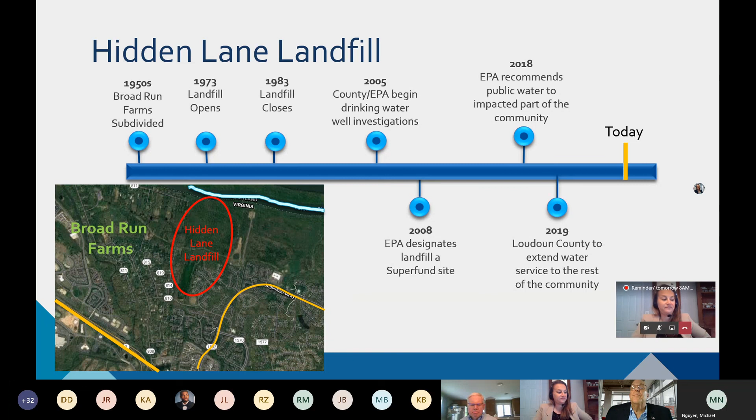I'm going to take a step back and talk about where Broad Run Farms is, so we get a better understanding. Broad Run Farms is north of Route 7—that's Route 7 right there—between Route 7 and the Potomac River.

One thing I want to point out on this map: this white line is the Potomac River. A lot of these lots down here are really close to the river and are in the floodplain. There could be wetlands—just something to keep in mind.

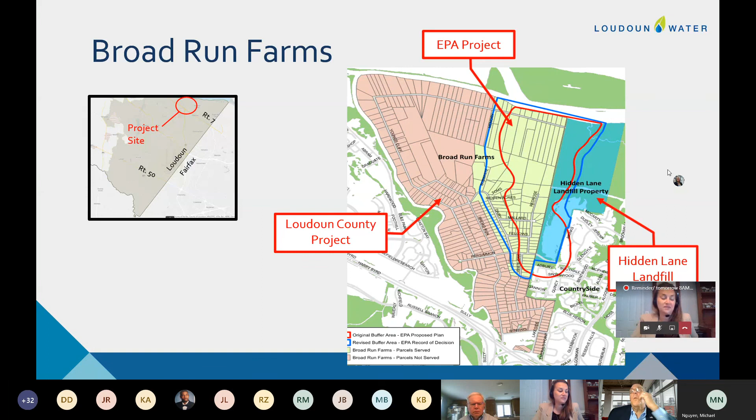The project consists of over 3.5 miles of 8 and 12-inch water main. We are going to provide a water service line and a meter crock for each of the buildable parcels, but we are not connecting any homes. The county isn't paying for any availability fees for these lots, so if a property owner would like to be connected to the public water system, they'll have to come back in with a plumber after our project is over and make the connection themselves.

Something else interesting about this project is it's a brownfield site, which brings up a lot of challenges. Because it's an existing community, we're going to try to stay in the VDOT right-of-way as much as possible. But as I mentioned before, there is an existing low-pressure sewer system out there.

Unfortunately, we think the sewer main is buried at about 3.5 feet deep, which is right where we'd like our water main to be. So it could present some challenges depending on where that sewer main was actually laid. Because it's already a developed community, we may also run into problems with the existing electric, communications, and possibly gas mains out there.

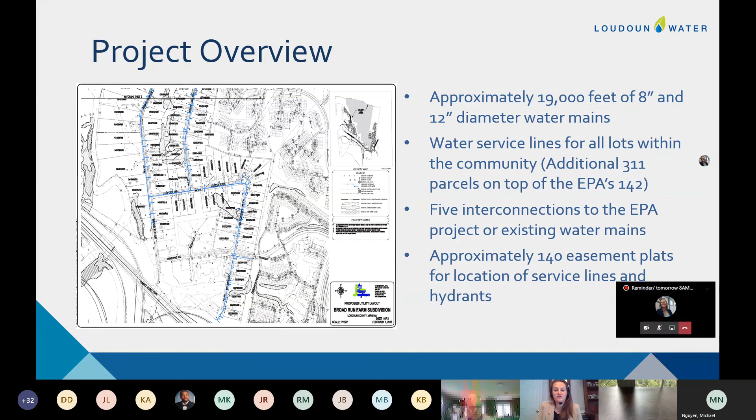So this project was included in our 2020 CIP. It's Water 138. We allocated $11 million for design and construction. This money will be fully reimbursed by the county, and the county has already authorized $1 million for the design.

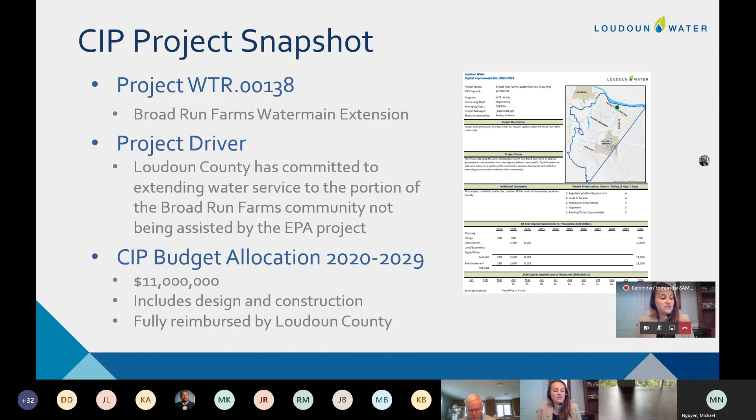So we wanted to talk a little bit about the task order fee and how we got there. As I said before, we're using J2 engineers for this design task order. We broke it down for you a little bit about how we got to that $752,000. Basically, J2 is about $500,000 of that, and then they have some sub-consultants to finish out the rest of that task order fee. The preliminary engineering that we're showing here includes all that field survey I was talking about, because we asked for the field run survey.

It includes gathering and reviewing any as-built drawings, either Loudoun Water as-built or any dry utility as-built, and reviewing that information. The design fee is literally just putting the plans and specifications together. We're assuming there'll probably be about 30 or 40 sheets in this plan set because it is just a water main, but it's over 3.5 miles of water main, so it's a lot of water main.

The permitting, like I said, it's a Loudoun County grading permit, it's a VSMP permit, it's a VDOT permit to actually get approved. And then the easements, we allocated money for about 60% of the lots to have an easement on them. So J2 will draft all those easement plats, one draft and one final, and hopefully we can make that work for the homeowners.

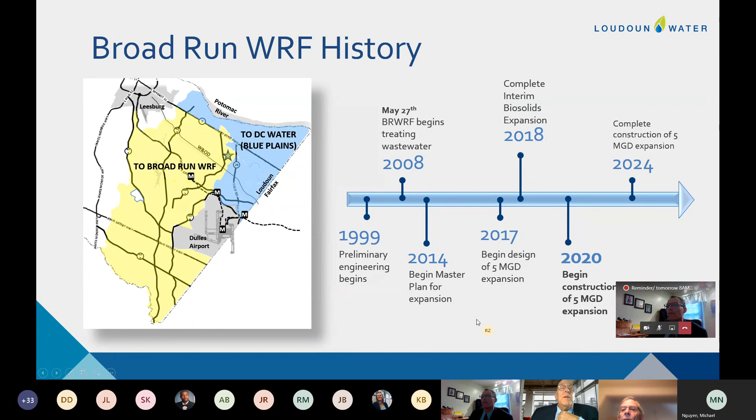Will the JLMA go to Broad Run? That will most likely go to Broad Run. It's sort of undecided at this point what that's going to look like, but in time that flow will probably go to Broad Run.

Some facts about Broad Run: it was commissioned in 2008, a 4-year construction process from '04 to '08. The original plant construction was $190 million for the initial 10 million gallon per day capacity, based on 2006 dollars. At the time, Broad Run was the largest membrane bioreactor treatment plant in the world when it came online in 2008. It's a very highly automated, state-of-the-art facility, and for good reason, because we have very strict discharge limits here in Loudoun County for the plant.

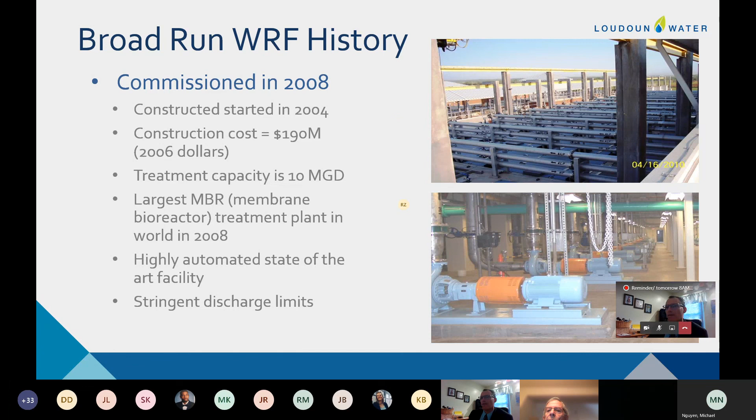That same philosophy applies to the next expansion, assumed to be up to 20 MGD out in the future by approximately the year 2030, give or take. Again, there's some uncertainty as you move out into future dates, because we need to take things year by year, and that's 10 years out. It'll come into clearer focus as we get there for the future expansion. But the point here is that growth and increasing wastewater flows are driving the need for this expansion to 15 MGD.

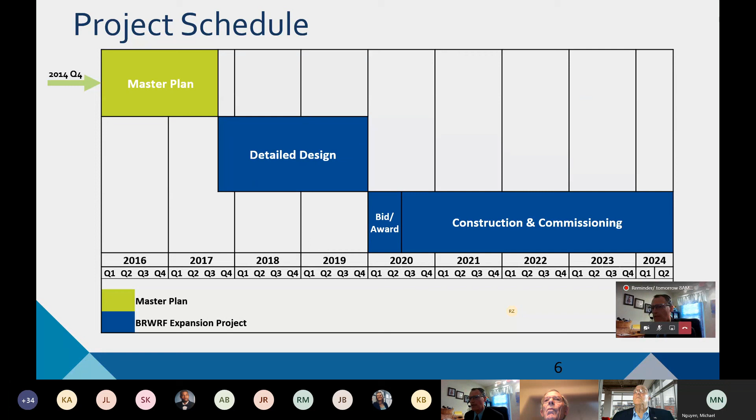Sure. I can say from my own personal experience, working on the tail end, a little bit of the preliminary design and through the design, that we've taken a lot of care with our contract documents to make sure the work and the scope is clear, and that we've done everything possible to assure it'll be complete by 2023, 2024. So that's one thing, and also there is some variability in the flows.

So that's one aspect, Rick, and if I could weigh in, another component of this is the fact that we have planned the work so that we have early milestones that include the additional equalization. We're doubling the size of the plant's equalization, which is more than necessary for this particular expansion. But there was some economy of scale in building a 10 MGD, or 10 million gallon, EQ basin with this project that will also be there and sufficient for the next expansion. That extra equalization gives us storage on site to deal with extra flow during times of heavy flow, and will help mitigate some of that risk you're talking about.

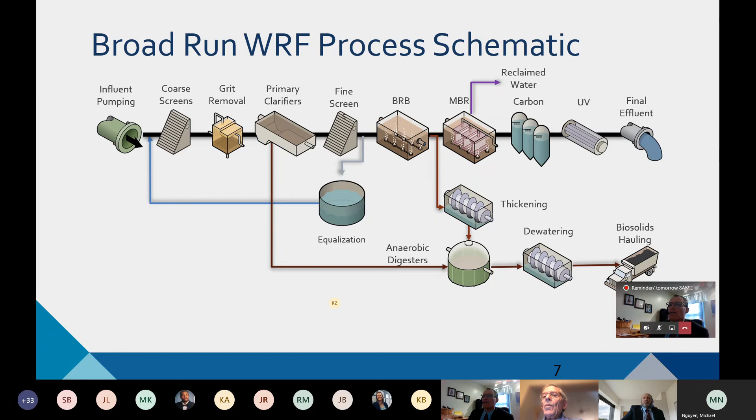I've got a process schematic of the existing Broad Run facility on the screen here. The liquid side of the plant moves from left to right across the top of the screen, and we've got our equalization, and the solids process drops down here and moves left to right on the bottom. When we start to add in the new treatment facilities, the yellow outline indicates new process structures included as part of the expansion project. These are more of the upfront preliminary and primary treatment processes where we're adding new footprint or new structures - of course, there's the equalization tank that Roddy mentioned as we were discussing the prior slide.

The blue shows where we're modifying existing process structures within the same building envelope or concrete footprint to re-rate them and get the capacity we need, so the overall plant has a 15 MGD capacity. It's the simpler structures and processes where we have new concrete footprint, and the more complicated processes where we're able to re-rate and make modifications in the existing footprint to get the additional capacity.

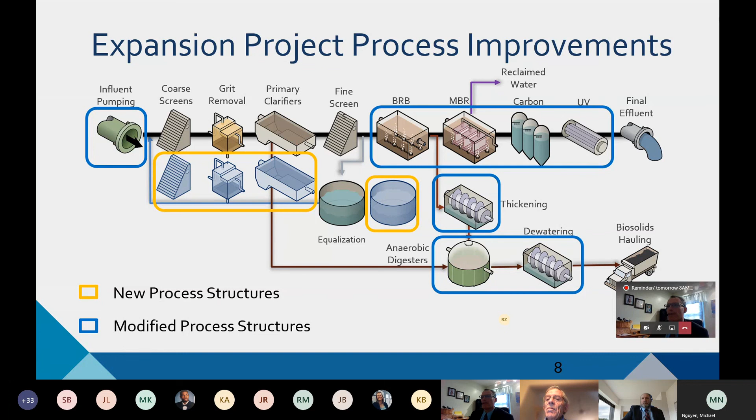As we take a look at a plan view of the project, I've got the same theme going, where yellow represents the new process structures and blue represents the modified process structures. The little red squares show a portion of some of the pipe-to-pipe tie-ins included in the project.

The point I want to illustrate here is that most of the plant is impacted by this project. It pretty well touches all of the processes, but again, the new process structures are minimal, as few as possible. We utilize the ability to modify process structures where possible to get additional capacity without having to build more concrete.

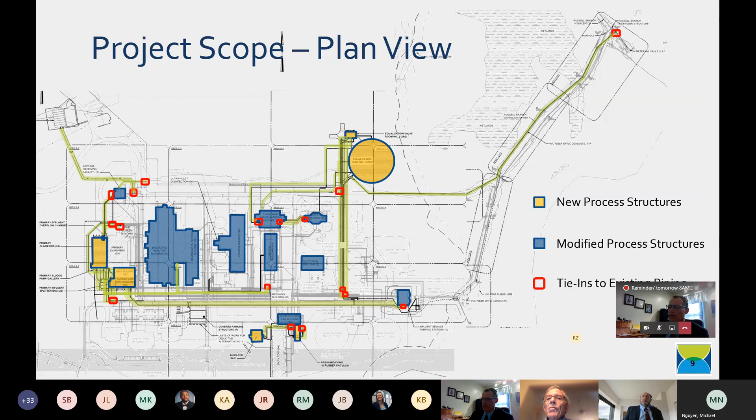This ties into the cost saving measures included in the project. One of the guiding principles of the master plan work done in 2014 to 2017 was that we were going to leverage existing assets first and utilize the resources we have built and in place to the greatest extent possible, in order to help get us the additional capacity.

We've done that by minimizing new structures and optimizing the secondary and advanced processes with modifications within the existing concrete footprint. It's those secondary and advanced processes that are more complicated and more expensive, so it does save money to be able to modify those without having to add additional concrete to get the additional capacity.

One other point to make is that our solids dewatering processes create a high strength side stream waste, and we are actually able to send that to DC Water for treatment rather than having to build a treatment process as part of the expansion to treat that small volume high strength waste stream.

The other point about cost savings is that there's an economy of scale factor built into the project, because we have consolidated several additional smaller CIP projects related to Broad Run, along with some repair and rehab items associated with Broad Run that were on the books, into the single contract, which gives you that nice economy of scale factor for this project.

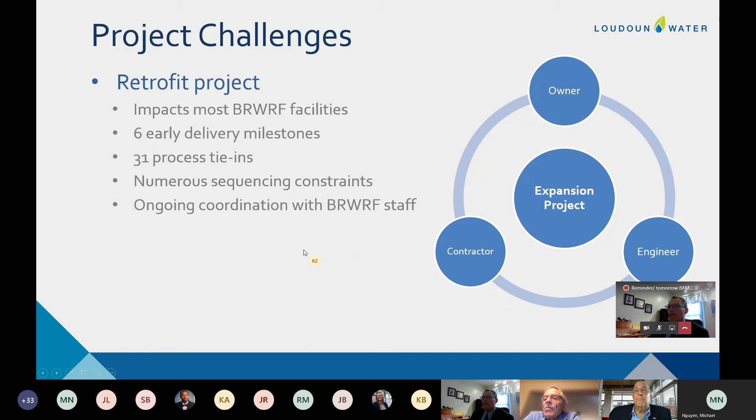But since this is a retrofit project and we are required to meet permit throughout the course of construction, in order to protect the public health, it casts a different light on the owner's responsibility. Meeting permit through the course of construction drives us as a top priority as we work to construct the new facilities, making sure we observe all the sequencing constraints and that all the tie-ins happen appropriately without disruption to the existing plant, so we protect the operation of the plant.

One point I want to add is that this project is kind of like a surgical procedure, or a series of surgical procedures that are very delicate, because we're working on an existing plant. Instead of doing the alternative, where we would expand the plant to the north as a kind of greenfield 50% expansion—basically building 50% of capacity, or 5 MGD, to the north and then tying it in at the end—that approach would cost a whole lot more, but it would be a little easier to manage because you'd just be tying in those facilities at the end.

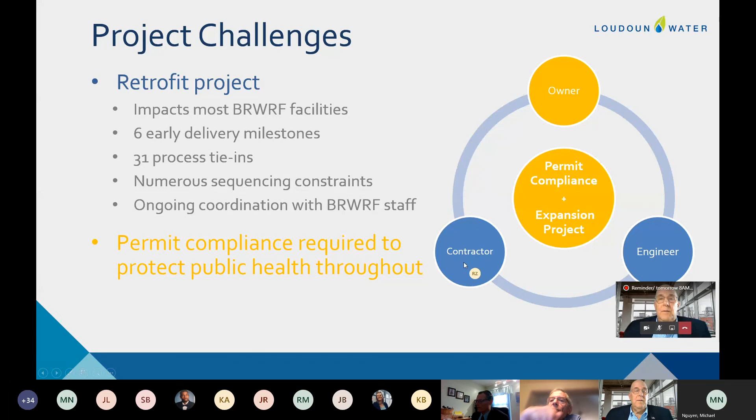Okay, and Rick, I have a question about the slide before. Yes. So you said you included additional related CIP projects and maintenance, repair, rehab items. About how much are those two items worth? I don't have an exact figure, but it's just a few percent. I'm going to say plus or minus 5% or so, based on some calculations I did 6 to 8 months ago.

And did Hazen design these related CIP projects? Some of them were already designed as separate projects, and then they were brought into the larger expansion. Some of them didn't have a whole lot of design really associated with them, and that's sort of the repair and rehab variety there, kind of replacement items, and there were one or two smaller designs that happened independent of the expansion project by Hazen that were then brought into the expansion project construction.

Okay, and will they be the projects that were designed before? Are they going to take over the construction administration, which I guess we're going to talk about next, on those CIP, those related projects? Right, they would be folded into the overall or the larger construction administration, yes.

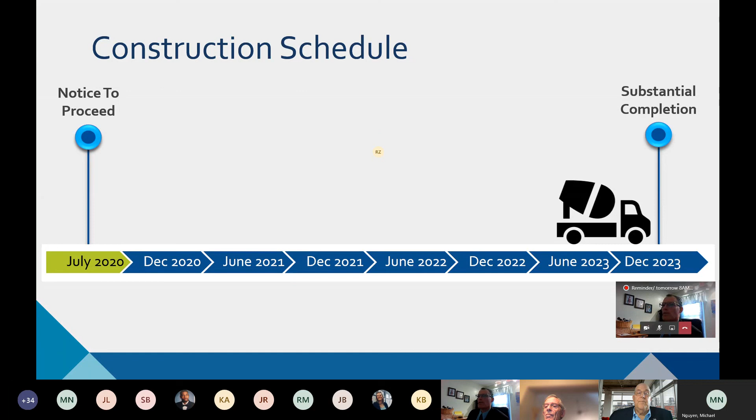So now we're going to walk through a construction schedule that will take us from notice to proceed to substantial completion, complying with all of the requirements I mentioned on the previous slide about meeting permit throughout the course of construction, the sequencing constraints, and other items built into the contract documents to protect us during construction. So we're going to step through in 6-month increments through the construction here. So here we are at the notice to proceed.

The hatched items are the buildings that were blue previously, where we're modifying existing structures. The darker items are the new concrete footprint that I characterized with yellow on the prior slides.

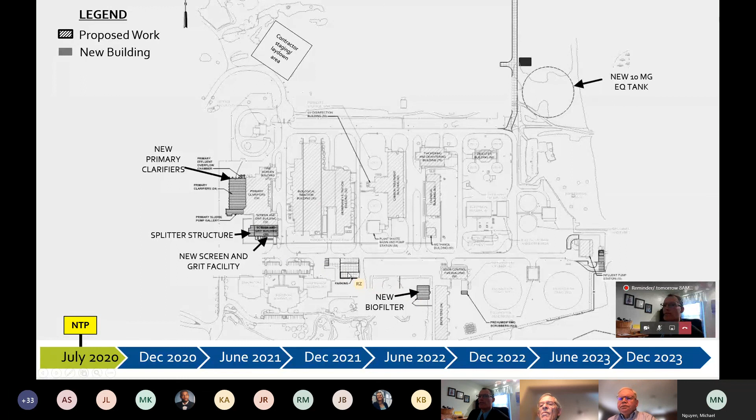During this first 6 months, we start to get into some of the early work. Of course, the contractor's trailers will happen very early. Then some of the work that starts is that early milestone work we discussed previously, which gets going here in the first 6 months. Also, some of the work that is less constrained, with simpler or even little to no constraints, starts to get going here in the first 6 months.

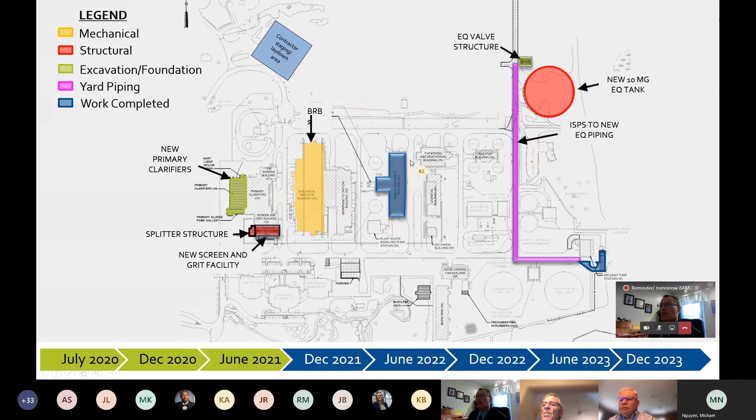As we move ahead, we pick up some more work areas. We actually start to see some of the early work finish, shown in blue, and some of the early milestone work finish. We're still ramping up construction activities.

We get into December 2021, and we've sort of maximized the amount of work. We have a constraint built in that says no more than 6 process areas of work can occur concurrently at any one time. So here we are kind of mid-stride, moving toward maximizing that constraint.

We've got the yard piping going on as well. We start to see a few more things completed, like our equalization tank and valve structure, which is that additional 10 MG of capacity for storage that we'll have by the midpoint of the project that Roddy mentioned.

And then we keep going, and things ramp up a little more. We've got more work finishing up here. Yard piping is kind of winding down at this point.

At this point in the project, all of the early delivery milestone work is done, and we start to get into a little bit more of the work that's more heavily constrained. That work is now ongoing, and it's a little bit more delicate at this point.

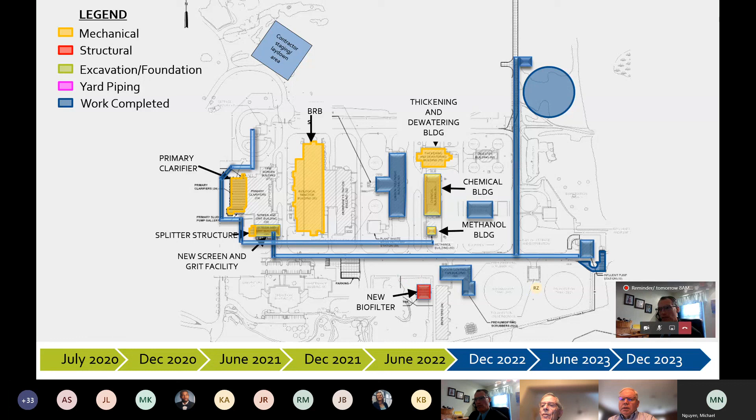We move ahead, and I'll just point out that the membrane work is perhaps the most delicate work of the project, which is why it's toward the back end of the project here. It's just getting started in this December 2022 timeframe.

As we roll on toward substantial completion, the last bit of work that's left is the membrane work, and everything else is completed. Then we jump ahead to our substantial completion date, and all of the work is completed.

So how did we get to this point of being on the doorstep of construction? We went through the bid and award process. It was late January that we advertised the project for bid.

Thankfully, we were able to squeeze our pre-bid conference and a pretty extensive field visit in late February before the COVID situation started. Then in the March, April timeframe, we were working on addenda to the contract documents. We had 9 addenda issued during the bid period, and the bid period was extended some because of COVID. Originally we were going to open bids in April, but they pushed to May because of the COVID situation. We received 4 bids on the 21st of May, and we're seeking board approval next week so we can get construction started late July, early August, hopefully.

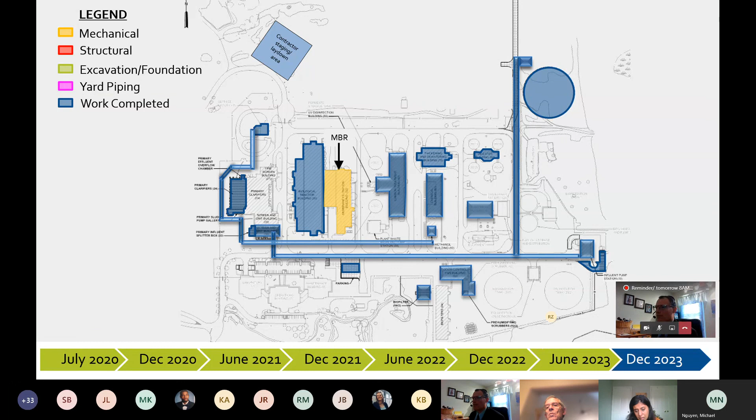If we're not looking at further delays or any unexpected contingencies — right, so I think it will take approximately 12 months, give or take, to do all of the membrane work. And there are very particular constraints in the contract documents about when this work can happen.

The holiday factor, the weekend factor plays in. We will be extremely careful and adamant that, number one, the construction work is protected from the elements, and number two, we're not left with one arm tied behind our back over a long holiday weekend where, if we had a big high flow event, we could be hurt because facilities were offline. So the meetings and discussions that precede this work will be lengthy and many, to be sure it happens with minimal impacts to the overall performance of the facility.

Okay, thank you. That was just my underlying issue — we want minimal impact, if you can say. I'm just looking at the unexpected contingencies here. So thank you for answering that. Yeah, we'll keep that in mind. Thank you, okay, thanks.

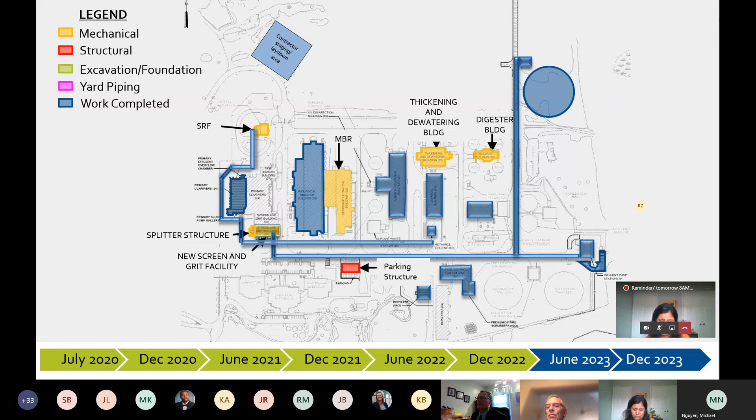Okay, so, any more questions before we talk about numbers? Yeah, I have a quick one. Okay, well, I don't know if it's quick, but once you go through this slide first, then — sure, okay.

We've got our bid tabulation presented for you. As I mentioned, we received 4 bids. We have a pretty good bid spread there, ranging from 76 million to 101 million. I've put our engineer's estimate there, which is within the bid spread. We felt like we got good competition on this project with the numbers here, and certainly a very favorable number from the low bidder.

I think a couple of things may have influenced the spread there, and particularly why Corman Kokosing was able to take the project so low.

I did speak with them, and they said COVID didn't scare them away from submitting a bid or from feeling like they could pull together the resources to prepare a bid or deliver the project. They said they're very busy and haven't missed a beat during COVID. However, contractors don't like to admit this, but I do think market conditions influenced by COVID may have pulled their bid down a bit lower than others, in an effort to keep staff busy or pick up a big job, to have a healthy backlog as we have rumors of being on the front end of a recession. It's nice to have a big backlog as a company to get you through a recession.

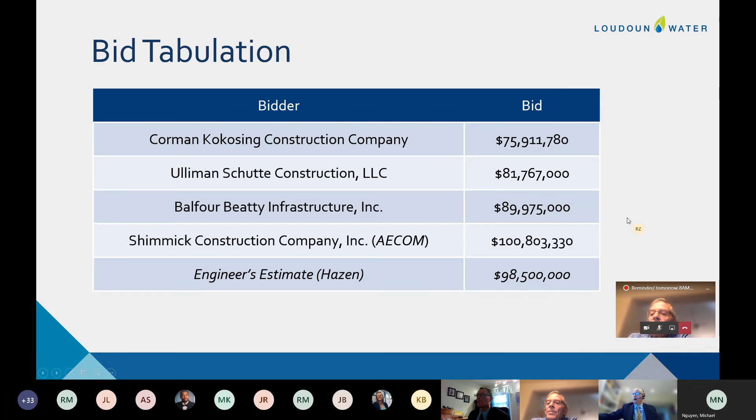I'll move ahead here. So in our bid evaluation, Corman Kokosing Construction Company was the apparent low bidder. And while this company is new to Loudoun Water, they're not new to the construction industry. They go way back, and they're a very large construction company. They have a Mid-Atlantic corporate office in Annapolis, Maryland, and they are full service, with heavy construction capabilities with water and wastewater infrastructure and treatment plant experience.

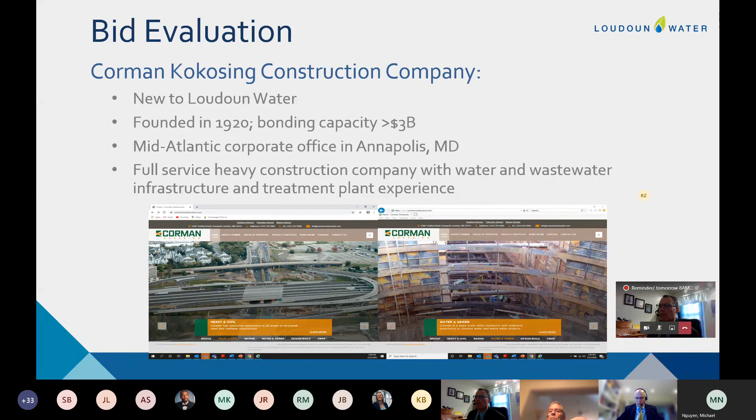I will say that in 2017, Corman Construction Company merged with Kokosing Industrial. Corman brought to the table the heavy civil, road, bridge, and utility specialties, and Kokosing Industrial brought the heavy industrial, power, water and wastewater, oil and gas, and marine capabilities. So the two of them together form a very large company with full service capabilities, including water and wastewater infrastructure.

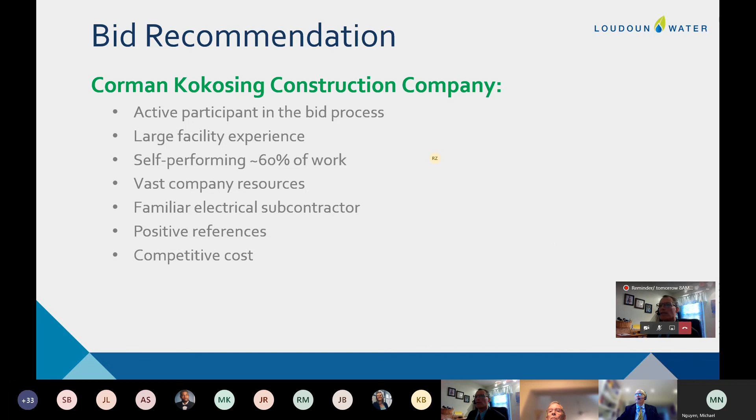In evaluating Corman Kokosing, we recommend that we go forward with the contract with them. They were an active participant in the bid process - they asked a lot of questions during the several months of the bid process. They have large facility experience, and they are going to self-perform about 60% of the work. Their company resources are top-notch.

They are using a familiar electrical subcontractor, the same one that worked on the Trap Rock project and the intake pump station. We checked out their references, and they were very positive, including water and wastewater improvements and plant improvements, and of course their cost is very competitive. They've done work as close as DC Water - in the picture here, I've got some pump station diversion work they recently did at DC Water. So all things considered, we're recommending that we proceed with Corman Kokosing. We feel like they're a very good fit for this project.

I have a question before you proceed forward. Would you please go back to the previous slide? Yes. So here, I just have a few questions.

First, when it says self-performing 60% of the work, I'm assuming the other 40% is going to be delegated to subcontractors? That's correct, yes. It's fine right now, but moving forward as a board director, it would be wonderful to know who the electrical subcontractors they're looking at are. Even if they haven't finalized a subcontractor, we still have a right to know who the subcontractors are that they are looking at, in terms of getting the other 40% of the work done.

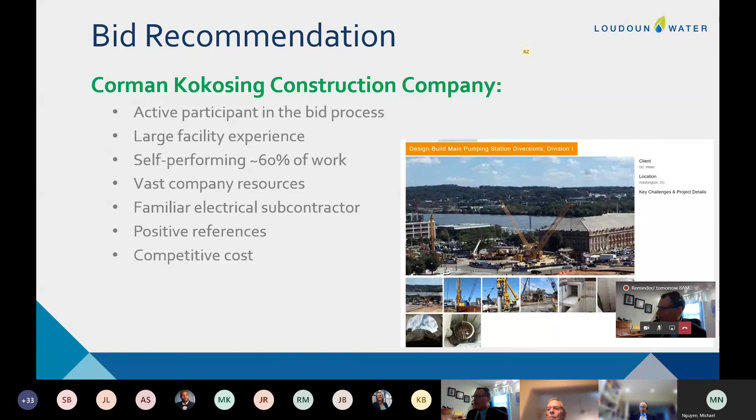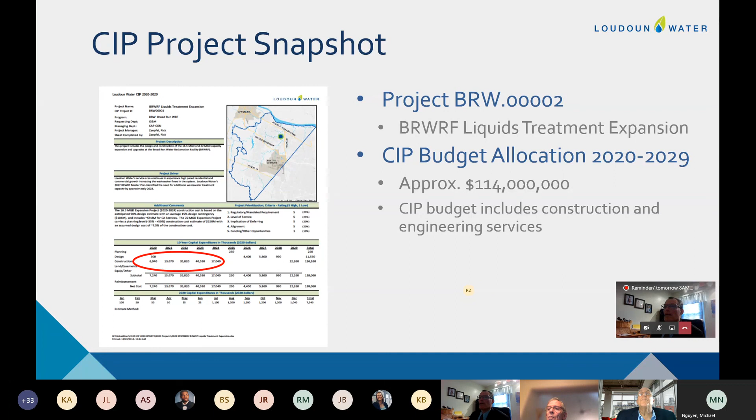We require that they be named in the bid form. So when they submit their bid, they have to list the major subs that they're going to use, and they have done that on their bid form. As far as dictating who they choose as subs, I don't really think we have. No, that wasn't what I was asking. Usually during the buyout, the contractor will change the subs, but if they list the subs on there, that's great. Much preferred, thank you.

All right, okay. Any other questions on this? Somebody want to make a motion then, obviously this shouldn't be under consent. I make a motion that we accept the motion as shown.

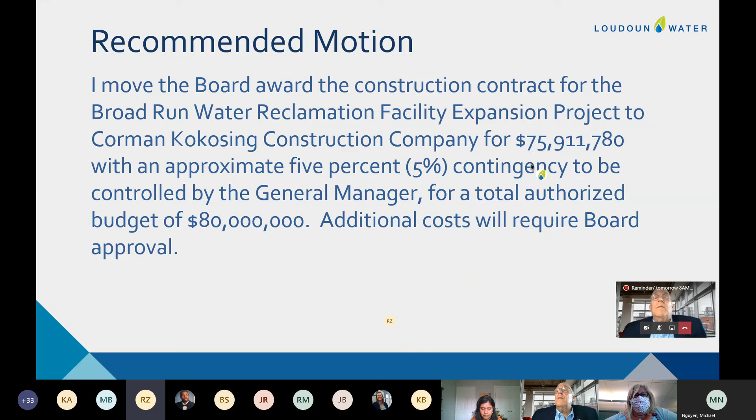So the next one we're going to talk about is the approval of the construction administration services for this project. As most of you know, maybe not Angeline yet, I've always had extreme concern over construction administration in general, not over this particular project. I've looked at this from every angle, and Brian has put together a very good package. This is a high CM fee, but I believe it is deserved. Brian is going to go through the specifics, but it is a high fee because I think this is a very, very technical job.

In fact, I think it's probably going to be more technical than the water treatment plant, not because maybe technical is not the correct word, but just the issues these people are going to have to go through seem tremendous. So it's a good lead in for you, Brian, go from there.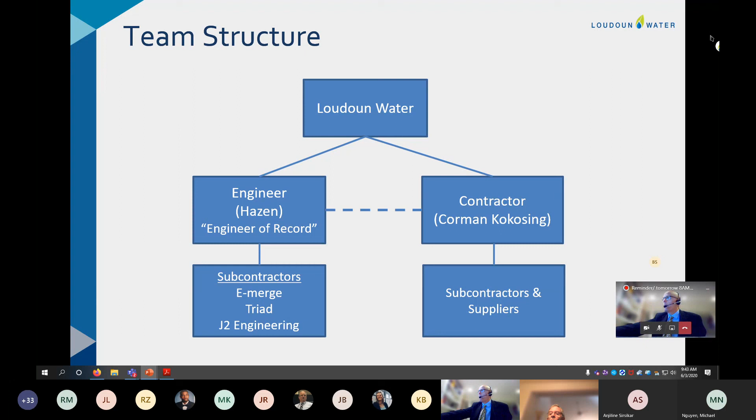Okay, roles and responsibilities. I'm not going to read all of these bullets to you.

In terms of our role as the owner, it's really overall contract administration for both contracts, the engineer's and the contractor's. We need to ensure compliance for both. We'll be monitoring and reporting the status to you, and next year I plan to start reporting status monthly to the CIP committee. Our role is to protect the investment and also to ensure operational compliance, so there's a heavy coordination role to make that happen.

Any questions on this slide?

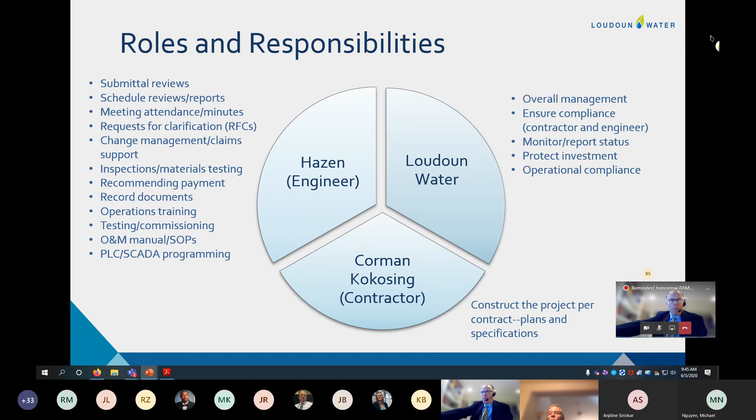Okay, a little bit about the scope and fee development. We began talking to Hazen back in the fall about the project, and we also got some feedback from Greeley and Hansen. We met with Dale Kovacs and John McGettigan from Greeley about the Potomac Water Program, because we wanted to understand things that they felt went well, but also things that perhaps could have gone a little bit better.

One of the things that they told us was that it's vital how we integrate the Loudoun Water inspectors, which we're going to have 2 inspectors on this project, into the project team and how they report. Our inspectors will be, for purposes of this project, reporting to the RPR who works for Hazen. For things outside of this contract that come up with standard company policy things, they would obviously continue to report to their manager. But for purposes of this project, they will be reporting to the RPR.

So the feedback we also got from Greeley was to ensure that we had simple and clear responsibilities for all the groups.

Hazen began in March to develop a bottom-up estimate as they recorded the scope from us. We went back and forth a little bit in the negotiation to make sure that we're fully covered, and then we got the estimate back in April, quite a while before the bids were received. So are there any questions about this slide?

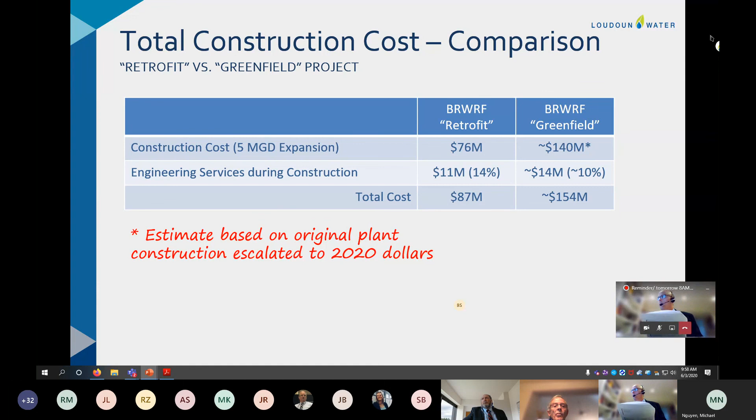But this project, to get the 5 MGD expansion that we need, is $76 million in construction, but our services are a little bit more than you would expect with a greenfield project. The total cost would still be significantly lower than a new plant or a new treatment train built to the north of the property. So the retrofit total cost would be $87 million. Any questions on this?

So as you read, I want to give you just a second to read through that and see if you have any questions. Any questions?

None for me. Thank you. Okay.

This is as we scoped out the labor and understanding when we expected Hazen's workforce to be fully engaged on the site. There is a ramp up before they have the full contingency of people on the site, and that would include office people as well. So I've got this little multicolored chart to show how we anticipate Hazen and its subconsultants coming onto the project and then off the project by quarter.

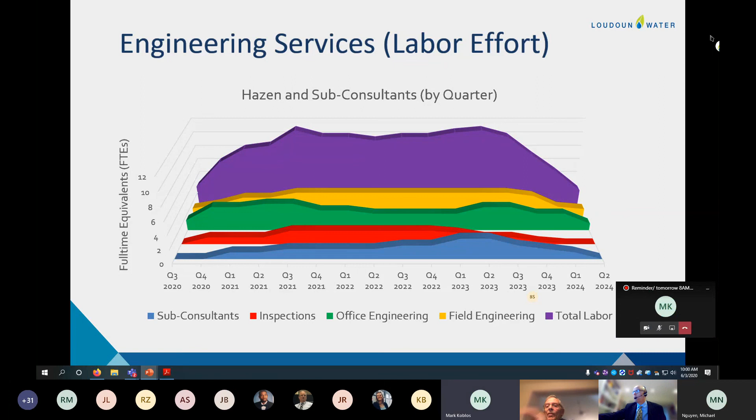Again, I'm going to close up pretty quickly here on the retrofit versus the greenfield, but we have 105 separate process tie-ins on this project. For the greenfield project, we would expect maybe 10% of that. If we could go to the north, we could make 10 ties across from the existing plant, and it would be much simpler. We could actually just start the project up in its entirety at the end, versus going through multiple startup sequences like we were going to do with the new equalization tank and the other milestones that Rick mentioned.

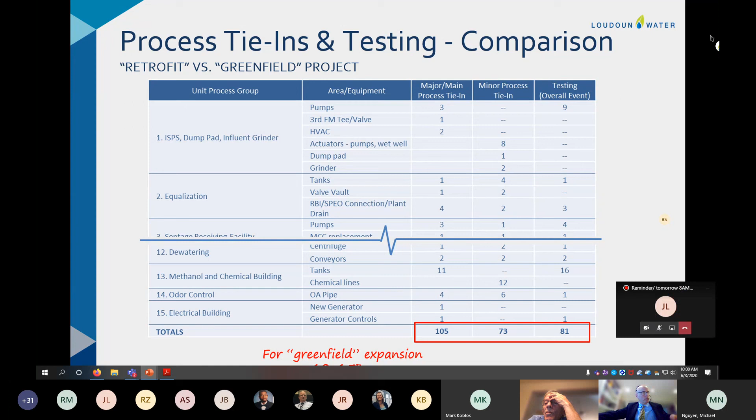Just a shop drawing comparison with Trap Rock, because I know that has come into question before, so I am presenting it as a percentage of construction cost. For Trap Rock, we spent just under $4.7 million on submittal reviews for a $133 million construction value, which was 3.5%. On Broad Run, our budget is $2.2 million, and the review cost as a percent of Corman-Kokosing's bid is 2.9%. So we are a little bit lower than Trap Rock.

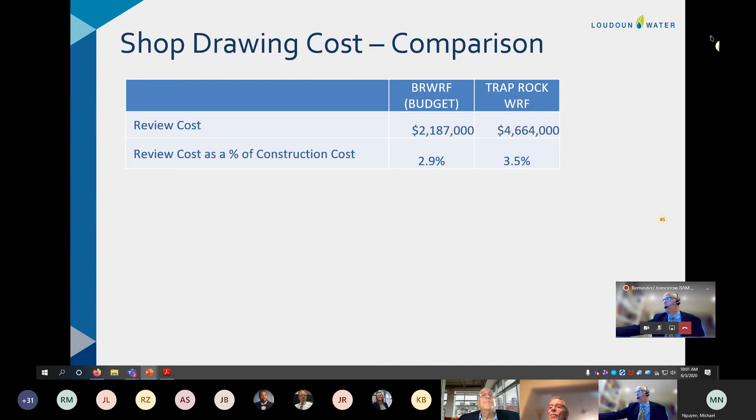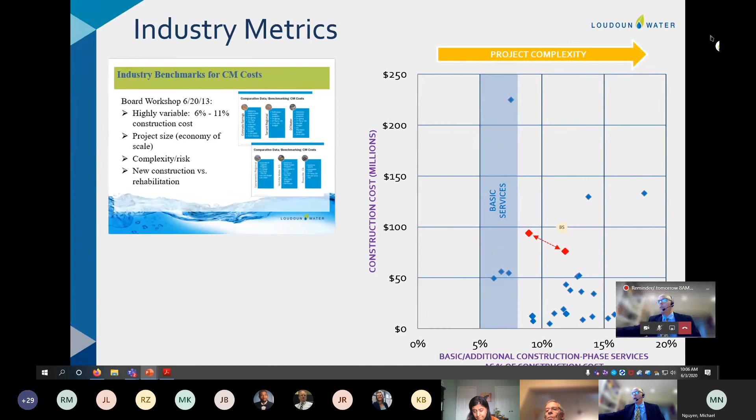Yeah, that's a good question. I'm going to go back a slide. For the Beaver Dam project, we don't have experience doing that type of construction. Our experience is in pump stations. We have some pump station experience and some linear work, water line and sewer, so we have some skills in-house to do inspection. But for Beaver Dam, we did not have the skill set to manage and oversee that inspection effort. That was a $17 million job, and in looking at it, we realized that was just not something we could do and protect our interests. So we felt it was in our best interest to contract that inspection to Gannett Fleming.

On the Horsepen project, we have over 4,000 feet of tunnels that we're putting in. The inspection of those tunnels is something we don't have experience with. We've done a little small jack and bore type work with small water line, but we're actually using a tunnel boring machine, or the contractor is, on that project. We felt we could protect our interests best by contracting that element of the Horsepen project out to the consultant. Does that answer your question?

It does. So there's another layer added to this, bear with me. If we don't have that experience with our inspectors, and we leverage external inspectors to do that, I just want to understand the oversight of that. Who's overseeing this, making sure it's getting adequately done?

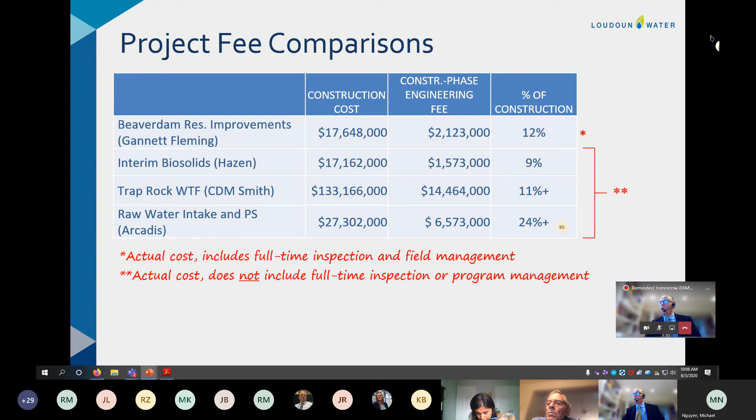So who's providing that oversight even though we don't have the skill set internally with our inspectors? For this project, we do have some experience doing plant and vertical construction, so our inspectors will be reporting directly to the RPR that Hazen is providing. It's really almost like a staff augmentation to their team. Our inspectors do have some experience in this type of work, so they'll be reporting to Hazen. If there's something where we don't have the inspection discipline-specific expertise, that's work Hazen could come out and look at. We also want a structural engineer out here periodically to provide another set of eyes on the project, but it's not on a full-time basis, just periodic observation.

I want to elaborate a bit more on that. We still have a project manager on this project, and overall we are the owner, and we will maintain oversight of both the engineer and the contractor through our team. We're really looking at this as a partnership, and we'll be partnering with Hazen on contract and inspections. We'll have some of our inspectors intermingled with their staff, so it's not as though they don't communicate directly with their managers and our project team as much as with the Hazen team. It's more of an integrated approach. We maintain ultimate control through our project manager. There is an RPR essentially in charge of all the inspectors on site, so they report their findings to the RPR, but that same information is reported to our project management staff. When we have to make decisions, there's a collaboration to come to final decisions.

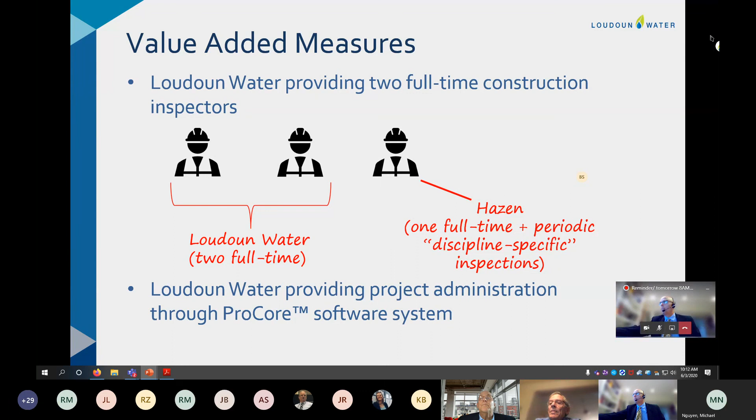Okay, with that, I have the recommended motion before you. I just want to make sure there are no other questions at all on this before we go to the motion. Go ahead, Marty. I do not have any at this time. I make the motion as written.

I second that. Second, Ms. Sursakar, thank you. I'm assuming this is going to go to action. Yeah, that's good. Okay, at 10 million, makes sense.

Roll call vote. Mr. Kobliss? Aye. Mr. Bonfils? Aye. Ms. Sursakar? Aye. Mr. Sultan? Aye. Unanimous, Mr. Kobliss.

Thank you. Thanks, Brian, very good presentation. I just ask that when we go to, for both you and Rick, to only have about a quarter of those slides. Obviously this is very important, and I think we've vetted it out as much as possible, but I would suggest we try to limit it to a half an hour for both projects to be talked about. Okay, thank you.

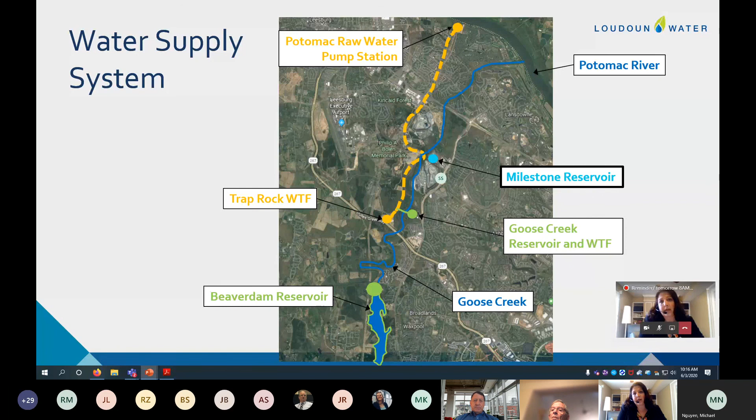So to orient you, this graphic shows all of the components of the Loudoun Water supply system, from the raw water intake up here on the Potomac all the way down to Beaverdam Reservoir. One of the last facilities that needs to be developed for inclusion into the system is the conversion of Quarry A into Milestone Reservoir. Quarry A is located here at this blue dot, almost geographically in the center of our system.

The project was originally conceived as a design-bid-build project, and the design was advanced to a 60% level. This graphic shows the major components of the current design, which includes a deep shaft pump station located here with submersible pumps, two raw water transmission mains that help bring water into the quarry from the Potomac and then transmit water from the quarry down to trap rock, and then a tunnel under Goose Creek, which helps facilitate the connection of those raw water transmission mains to the overall system. The site is bordered by the W&OD trail, this green area, Goose Creek, and also the private property around it, so it's a tight site to work within.

After the 60% design was delivered in November of 2016, Loudoun Water staff decided to take a step back and evaluate the best way to address some of the risks and challenges raised during the design, in particular related to site construction and some of the safety aspects of the project. These discussions led to the conclusion that alternative project delivery would be the preferred way to address these risks. In March of this year, Black & Veatch was brought on board to assist in determining which alternative delivery method would be best suited for this project.

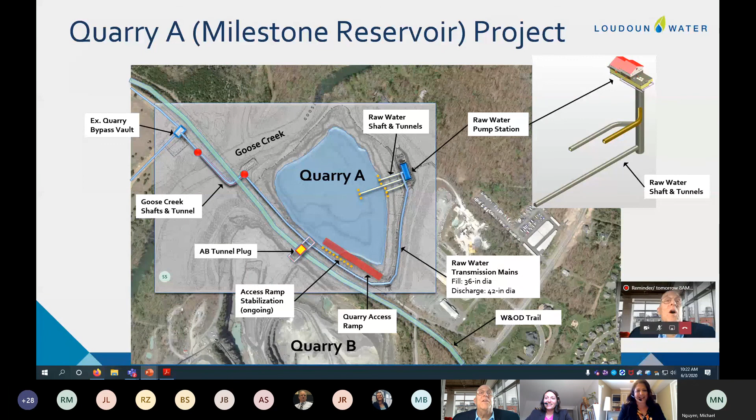Okay, yeah, thank you. Again, Savita, I'm sorry, I didn't mean to, I was just kind of curious. It came to me whether we have to put in a new vault or how that works, but it sounds like it's a ways in the future.

Thanks. Yep. Okay, so I'm going to give a little intro on Chris. So Chris is a vice president in Black & Veatch's water division, and he's also the business line director for program and construction management in their heavy civil group. He has over 30 years of experience in the design and construction of tunnels and reservoirs, and is a known expert in the heavy civil field. So he's going to give the rest of the presentation.

I did want to introduce Mike. He's not going to speak today, but you may see him at future board meetings, so I thought I'd just give him a little intro.

Mike is going to be the project manager for Black & Veatch, and he is locally based in Maryland. He has 29 years of experience in the design and construction of water and wastewater facilities, and he's done a number of alternative delivery projects in Virginia for clients such as Fairfax County.

Okay, so Chris, go ahead. Thank you, Savita. As Savita indicated earlier in the presentation, Black & Veatch was brought on several months ago to help Loudoun Water make good decisions on the delivery method for the quarry project based on the risks inherent with the work and other key considerations.

On a broad basis, we looked at and discussed three different delivery options for the project. The first we might refer to as traditional. This is a design bid build format, in which Loudoun Water, as the owner of the project, would hold separate contracts for engineering and design with their engineer of record, and a separate contract for the construction. Characteristically, the construction contract would be awarded on the basis of the lowest responsive bid, so price is a significant component of that selection and award to a contractor that builds the work.

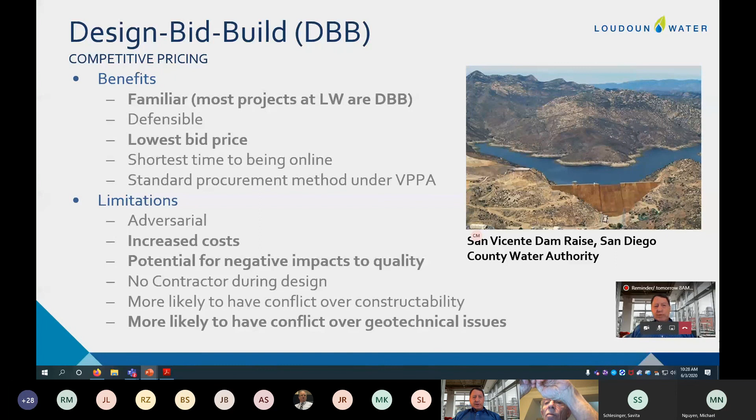In design bid build, the relationships can be strained and at times adversarial. Depending on market conditions, you often have contractors who necessarily bid the work below their expected cost, and they look to make that up through claims and related change orders over the course of construction, which can significantly increase cost depending on the merits of those claims. There's also potential for impacts to quality of the work as the contractor looks to reduce his cost, and the relationships can be adversarial, with more likely conflict over geotechnical related issues, which are a significant risk on this particular project.

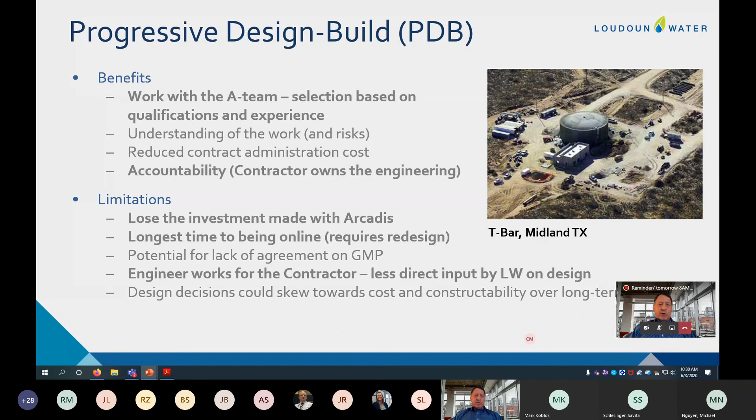In this case, as pointed out earlier, the engineer works for the contractor. While it seeks to establish a collaborative relationship between Loudoun Water and the design build contractor, at the end of the day, that engineer reports to the contractor. So there's less opportunity in that format for Loudoun Water to influence and provide direct input to the design.

With the construction management at risk delivery method, there are similar benefits in some respects to the progressive design build format, in the sense that the selection of a CMAR contractor would be based substantially on their qualifications and experience. In this particular case, Arcadis would be retained as the designer to work with the CMAR contractor to complete that design, which would reduce schedule and increase efficiency in finalizing that design and getting packages broken out for construction.

There's increased collaboration and innovation in this delivery format that you would not have with design bid build or necessarily with progressive design build. It's the most likely to result in optimal design, balancing cost, long-term operation and maintenance considerations, safety, and constructability.

The most substantial limitation to CMAR in this case, working within the state of Virginia, is that public contract law limits self-performance to 10% of the contract. There will certainly be some contractors in the marketplace who, due to an inability to self-perform more of the work, may see that as a limitation to competing for work on the quarry project with this delivery model.

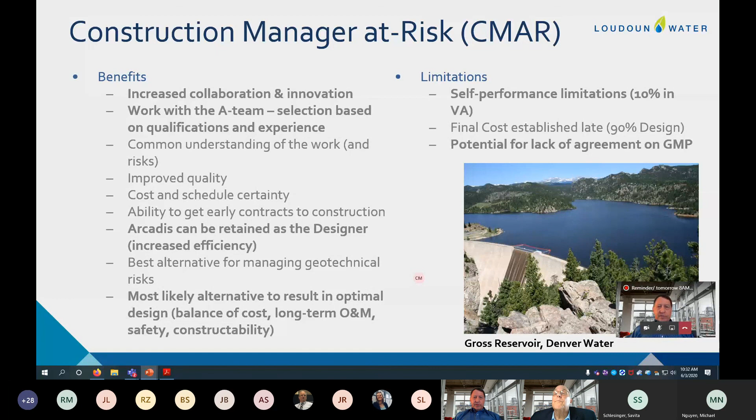And as would be true even with the progressive design build format, there is potential for lack of agreement on a guaranteed maximum price. The contract terms would provide for an off-ramp if that were the case, in which case the work could be delivered in a different manner.

Hey, Chris. Yeah, first of all, it looks like you're in my office. You have the same office background I have. I'm on the other side of the office, though, Mr. Kovas. But yes, that's the only thing.

Yes, go ahead. I think it's important to point out that you have talked to many contractors already, and there are people who won't walk away because there's not more for them to do. But you have talked to many of the larger companies, and they are going to bid this project.

That is correct. We are working with Loudoun Water on an aggressive contractor outreach program. There has been interest consequential to those efforts, basically phone calls at this particular point. We do intend later in the summer to bring contractors together for an online meeting, given the COVID restrictions, to conduct an industry day to introduce interested contractors to the work and discuss the schedule.

I'm sorry, is everyone hearing me okay?

Yes, you're fine, Chris. Okay, I wasn't sure what the message was, but in any case, as I was starting to say, we are reaching out to the industry, making contractors well aware of the opportunity, and do intend to conduct an industry day in June.

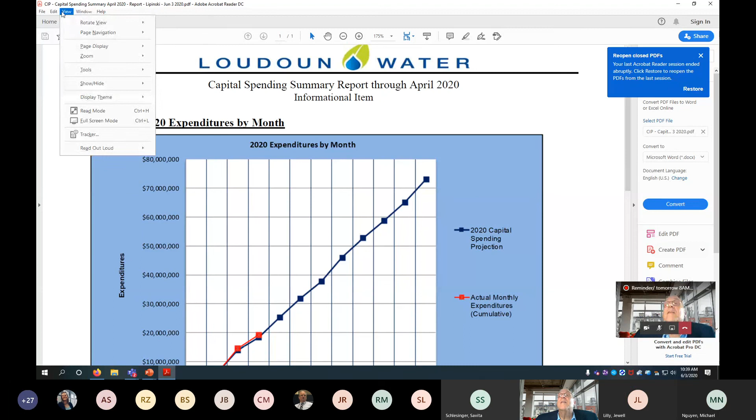Any questions on this slide for Tom? All right, thank you, Tom.